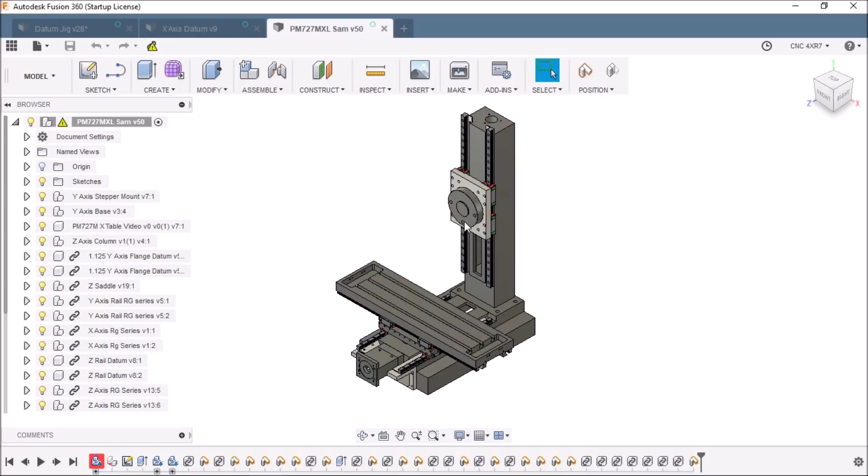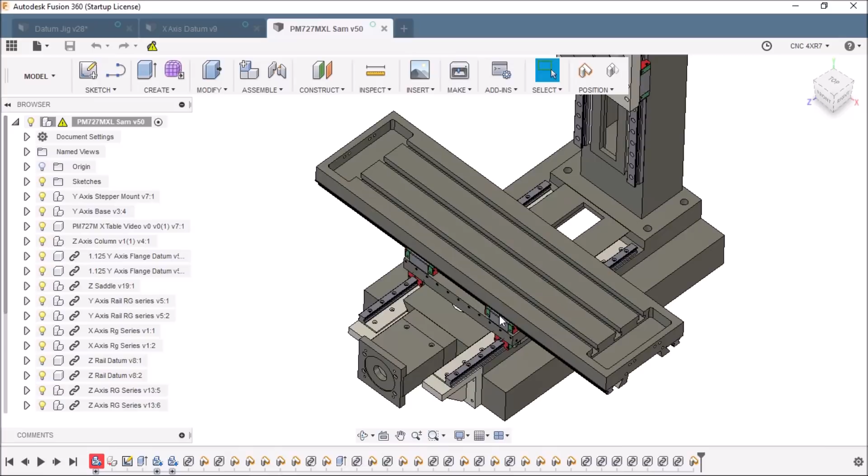Now in the previous video we discussed the model, and more specifically the way that we're going to mount the linear rails. We're going to be using these precision ground bars to use as our artificial datum here. That way we don't have to machine into our column and our base and destroy any of the castings. So let's take a look at how we're going to make a jig so that we can bore these holes.

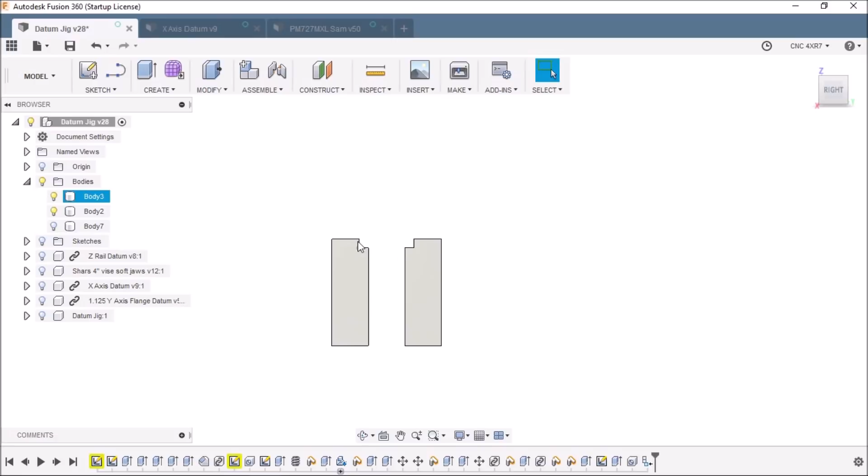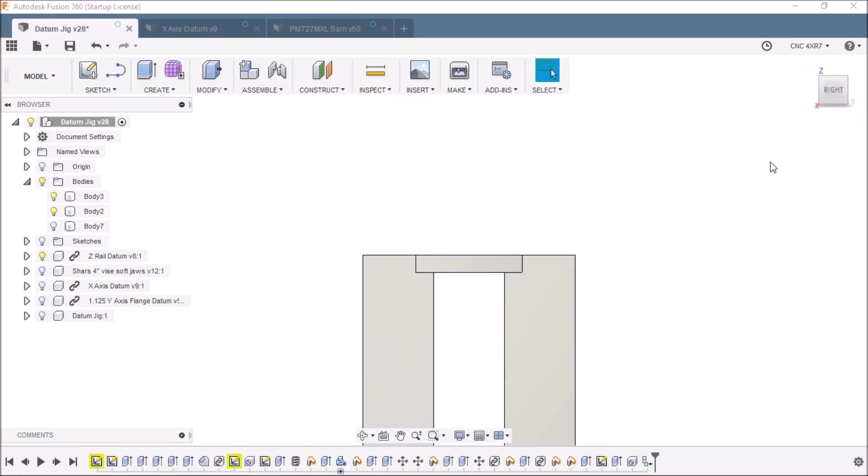Basically what I've just done is machined a couple of soft jaws. These are just aluminum soft jaws for my 4-inch vise. I have then put a rabbet or a shelf 1/8 of an inch by 1/8 of an inch, and this will allow the Z and the X datum to just kind of be able to be clamped together like so into the soft jaws.

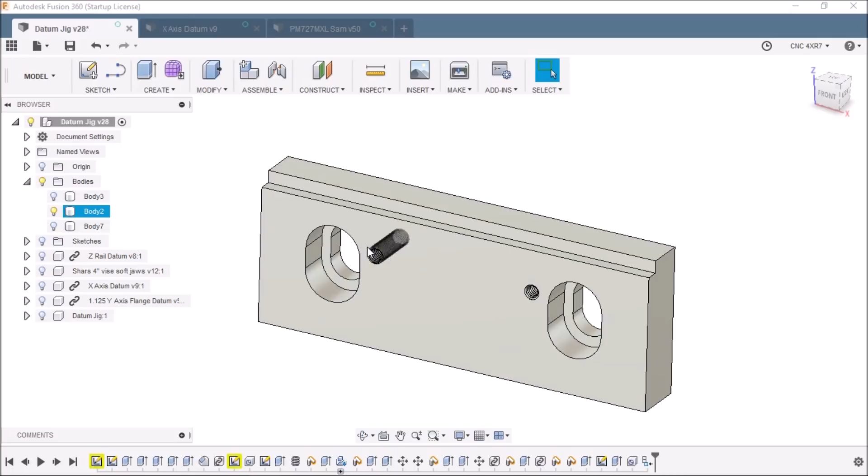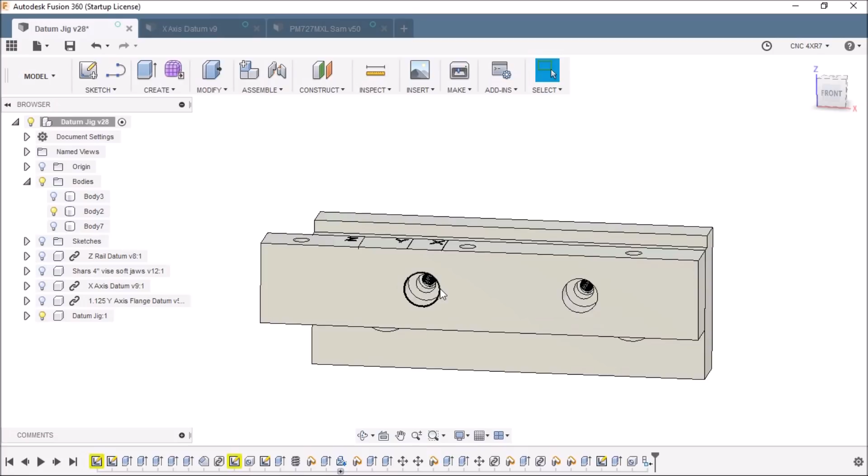Well, that's great, but we need to be able to index these holes because the datums are 27 inches long. So the way I decided to do that was to bore a couple of holes here in my back fixed soft jaw, and then I just made this aluminum jig here. So we've got a couple holes bored in here, and then we're going to use some M5 by 15 socket head cap screws to mount that.

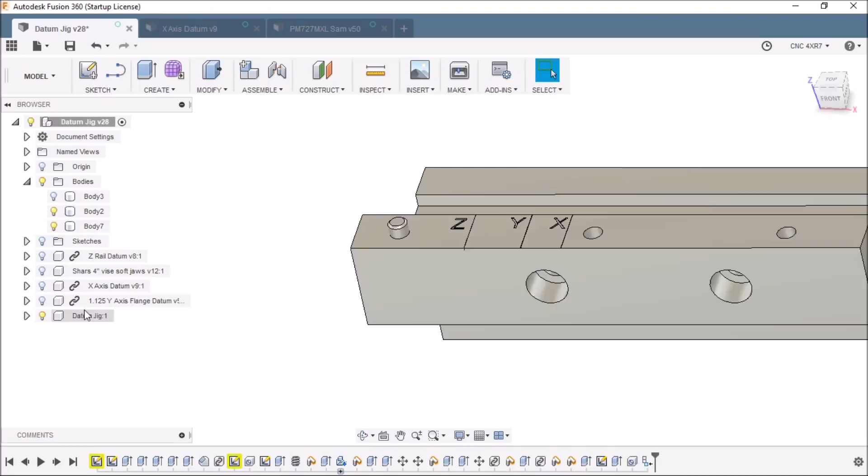And then we've just put a pin here. This is a 4.2 millimeter diameter pin, which is the diameter of the hole here that we're going to be machining into the datums. And so what happens is we'll index the edge of the datum on this line I've scribed here for the Z-axis. That is the distance between this edge and the first hole.

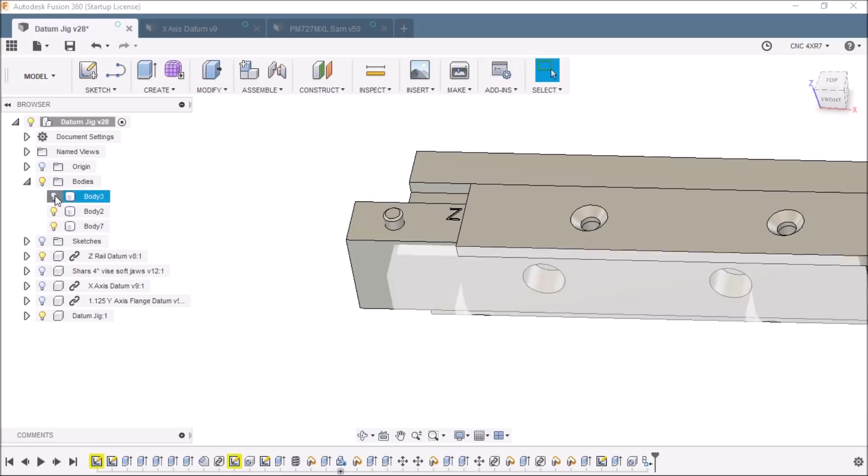They all vary between the different datums. We have our X and our Y datums. So the starting point's a little different, so I just scribed a line onto the jig. So what will happen is we'll bore our first two holes here. We'll clamp it up like so. We'll machine these two holes and countersinks.

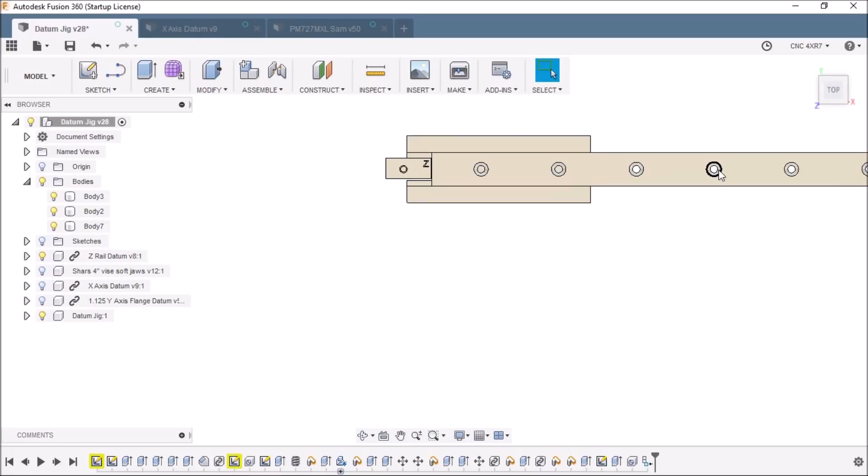We'll then unclamp it, pick it up, and we'll put this hole over our pin. Or actually this hole, I'm sorry, over our pin. And when we do that, then we'll just move down to the next two holes. Take this hole, put it on our pin, and we're going to do 2 holes per cycle. This was just the simplest way for me to do it.

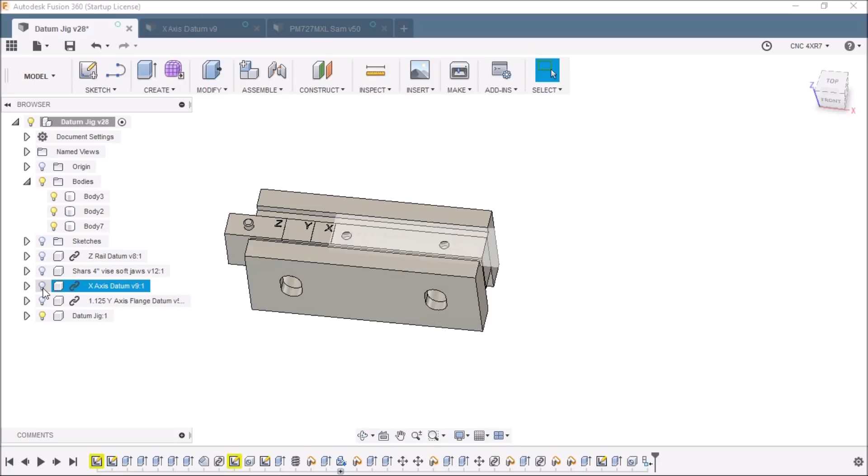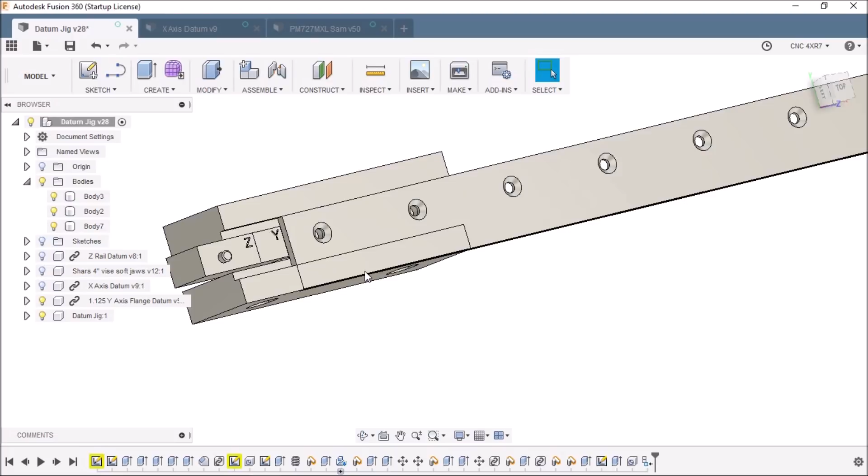That way I could use the same setup for the Z-axis, the X-axis, and the Y-axis. Now the Y-axis, of course, it works just fine. It's just the hole's going to be off-center, which is great. We'll put this edge towards the rail, and that'll help hold that down. And then that way I can get away with using the same jig for all 3 datums. Doesn't really matter if the hole's in the center or not. We're just trying to secure this to the base. So that's what I came up with for our datum jig.

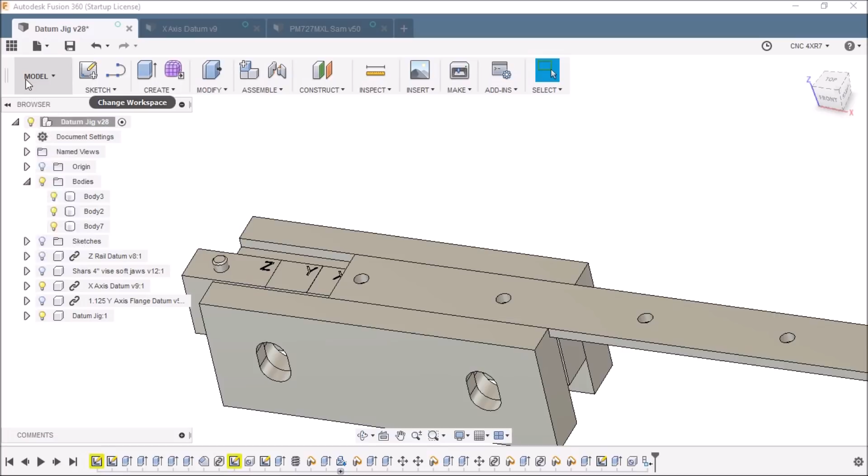Now one thing I ran into while trying to CAM out these holes and countersinks, Fusion 360 does not like to have the countersink already drawn when you're doing your CAM. And I'm not quite sure the best route to go about doing the countersink hole. This is what I came up with, which is about 10 different quick operations.

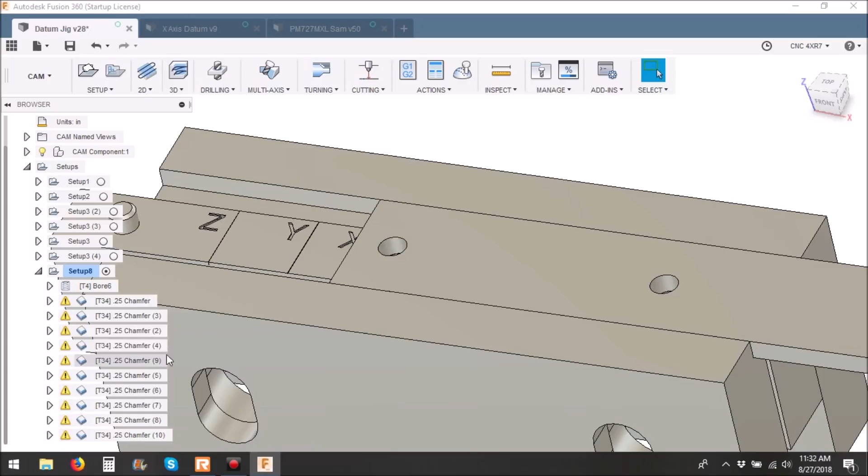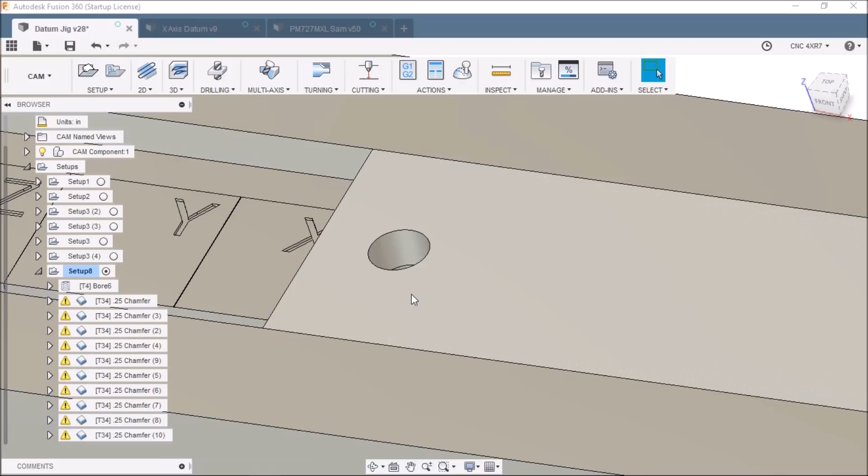And I know you think, man, you must be crazy. Why are you doing so many operations for just a little countersink? However, I didn't want to go down to the full depth and hog all this material out. This is steel, so I'm trying to just take a little bit with each operation. I don't understand why Fusion 360, and I couldn't figure out a way to do this, but with the boring operation, you can see we can just kind of spiral mill the hole.

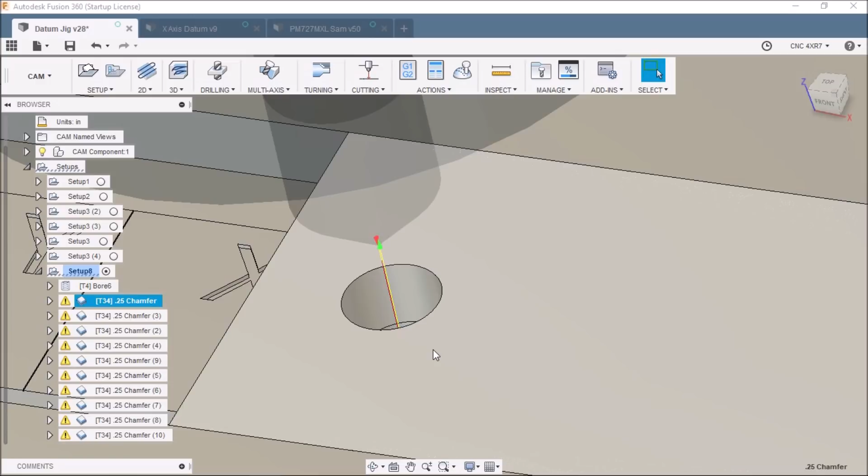Well, it would be great if we could just spiral mill the chamfer. Then I could just get away with doing it with one operation. We could sort of just spiral down to the correct depth, do one more circle just to clean the edge up, and be done with it. However, the CAM operation and parameters do not have, or at least I couldn't figure out a way to make it spiral mill. It does have a ramp speed here when you're selecting the tool.

On the geometry, that's another thing. If it's a countersink, then it has this big old diameter here, and this diameter is, you know, halfway down the thickness of the stock. So you have to not draw the countersink in order to get this diameter up top here. That was another thing that I kind of had to mess around with.

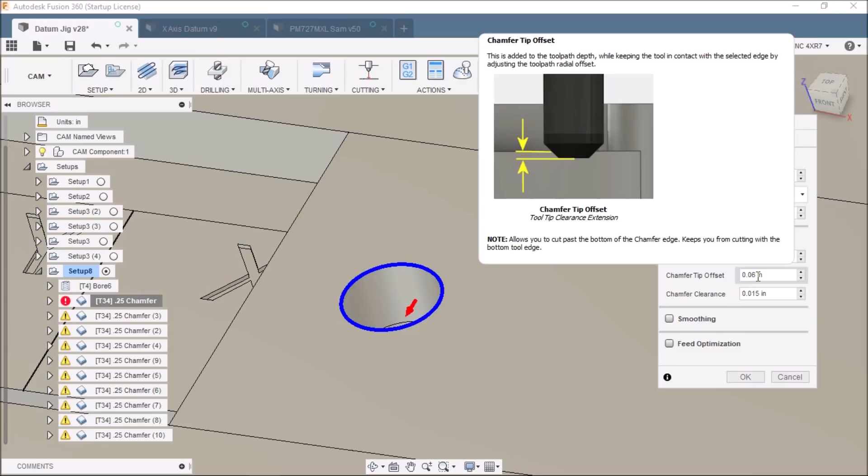On the passes, the only thing you can really mess with is the chamfer width, which is the amount of the tool that's going to be used, and then the offset here, which I'm using for the height. And you have to kind of play around with these numbers in order to get the correct chamfer that you need. But I couldn't see anything that would allow you to kind of ramp down in there. Maybe it's just my not understanding or something, but this is what I've got.

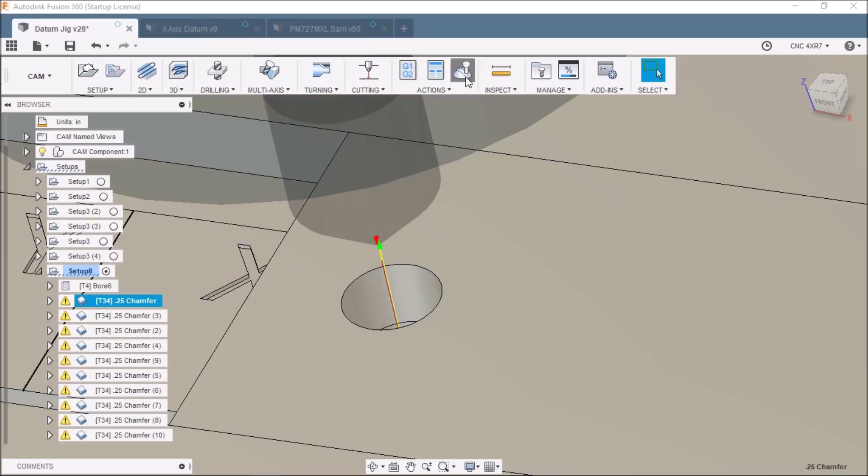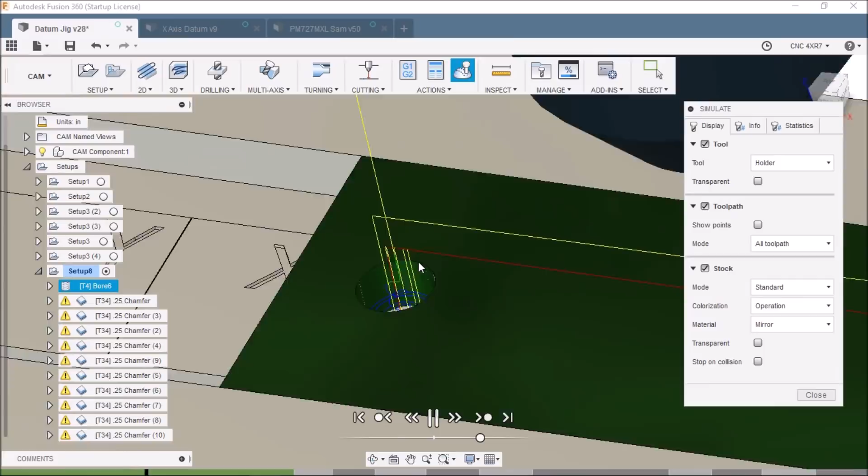I just go down. Well, let me show you the stock here. I just go down, and then I'm going to chamfer just a little bit with one pass, and then progressively we'll just do the whole thing here. I'm going to progressively go down. I'm going to bore the hole. Actually, we're boring two holes, both of them here with this operation. And then, well, I went too fast there, but with each operation,

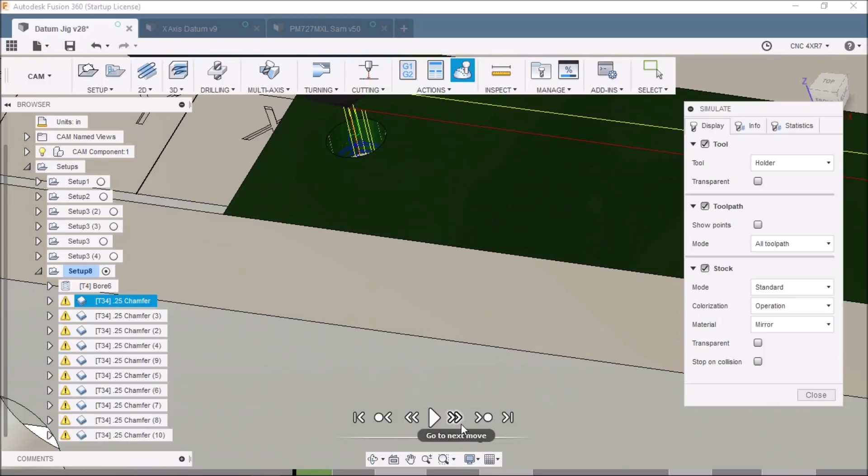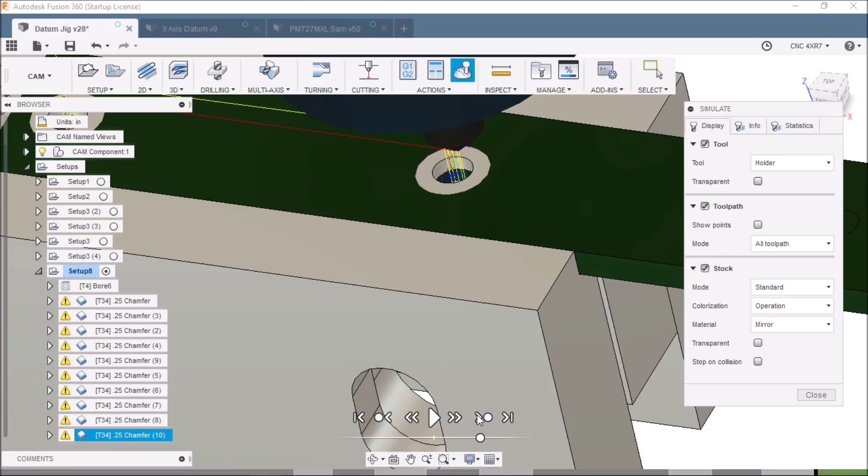you can see we will do a little bit more, a little bit more, a little bit more, and we'll do this final pass one additional time just to make sure it's clean, and then we'll move over to the next hole. We'll do it a little more, a little more, a little more, and one additional pass just to clean it up. That's how I plan to machine this out. It's really not ideal. However, I couldn't figure out a way to ramp this down.

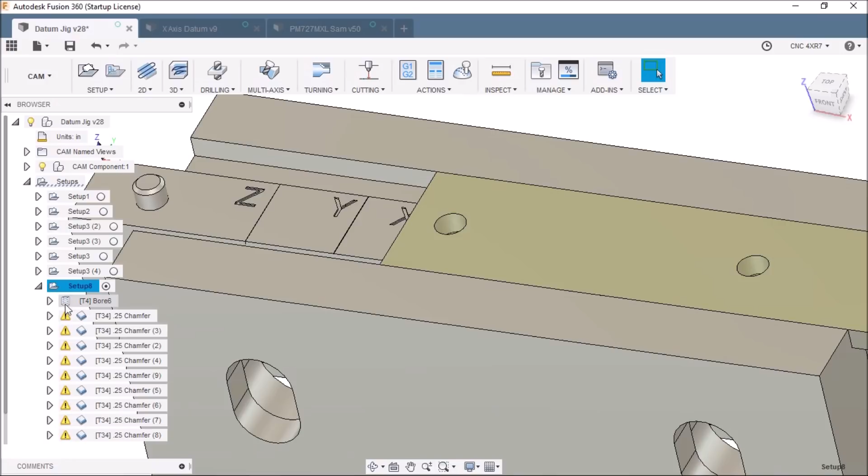I thought, well, maybe I could fool Fusion 360 into letting me just do another boring operation. However, if you do that, you can't select a chamfer mill. So you'd have to create a fake end mill and try to do it that way and figure that out. Maybe you could do it like that. So I'm going to just try this and see how it works out. But that is our datum jig, and hopefully it'll work out just fine. So let's go out to the mill and we'll machine out some of these datums.

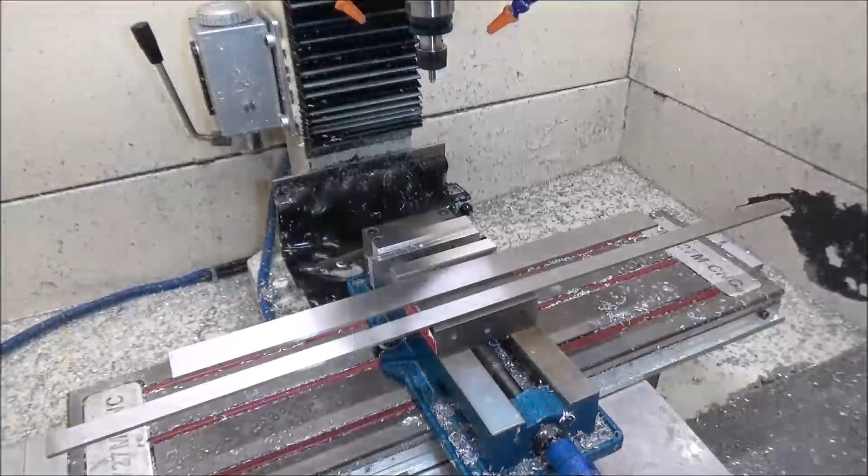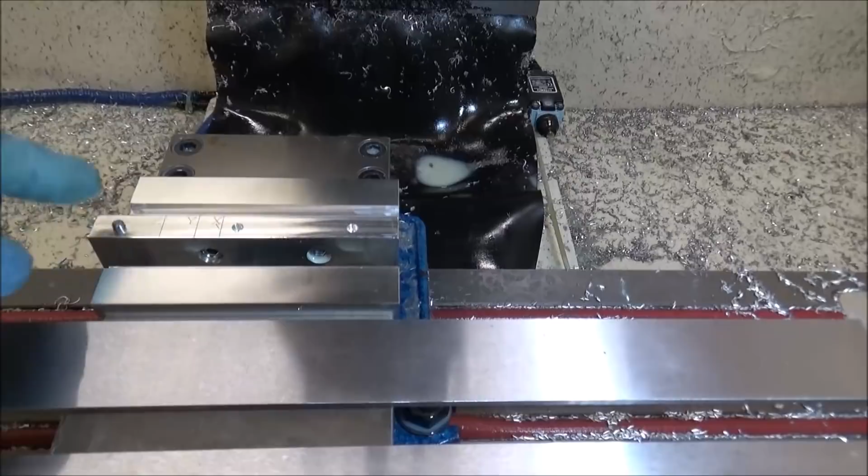Hey guys, well, here I'm at the mill, and you can see how the jig is created here. I've just got a couple of soft jaws, and then I've just mounted a jig with the pin here, and I've marked the starting location. I actually engraved that for the X, Y, and Z, and then all the subsequent ops will be here and here. And these are, I made them 43 millimeters apart.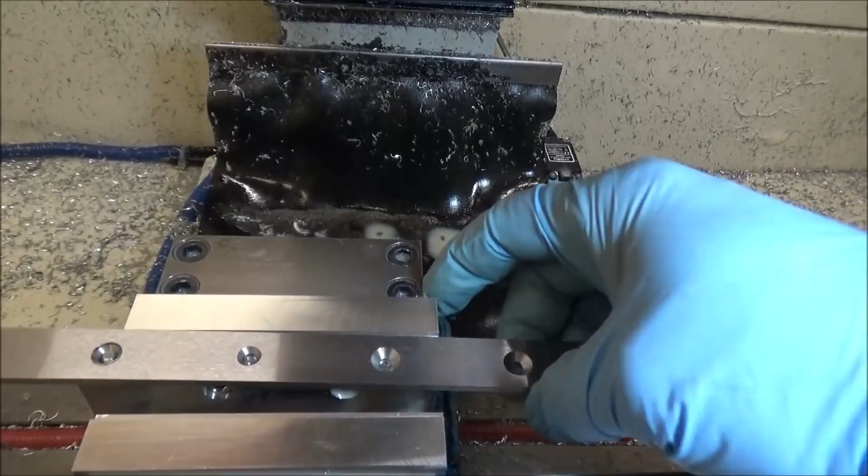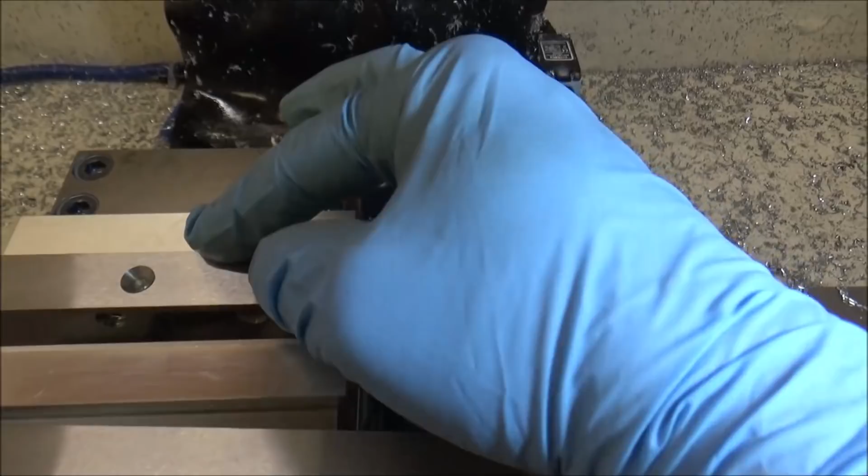So I took a scrap piece. This one's for my X. So I started off right here. Just lined that up, made the first operation. Then I take and put that second hole on my jig, clamp it up, and do the next two holes. Then just keep going down like so. Do the next two until I do the whole thing, which in this case the X is 27 inches long.

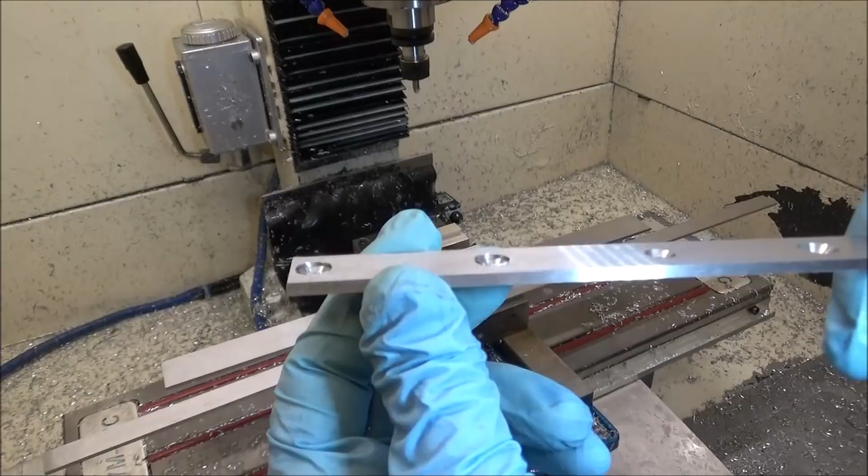I was having trouble with the countersink operation here. Let me put this back. I was having trouble with the chamfer operation. You can see I went too far there and there's like a burr. Then I tried it, made some adjustments, came back, and it was too shallow. This one, the depth was okay, but it was too deep and it kind of made that burr. Don't want that. This one was too shallow. The head of the screw is sticking up. It needs to be flush or below.

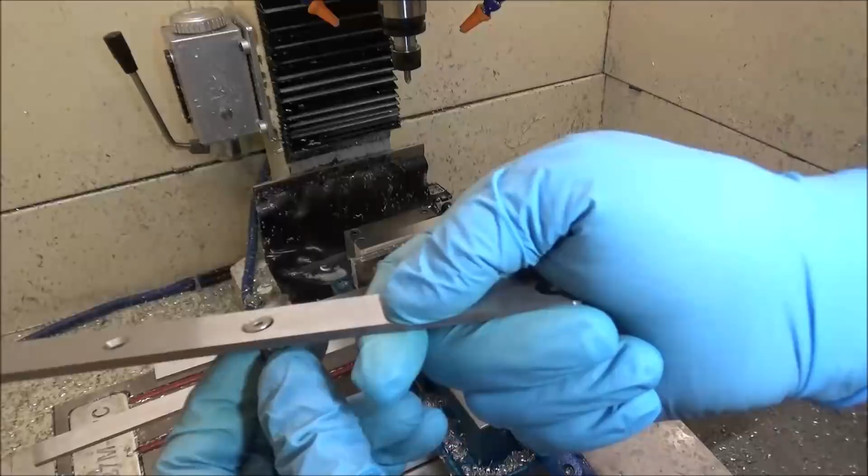Then I made some more adjustments and I got it below, but it's too far below. So I came back and finally I think I've got it just right, where it's just below the surface there. It's not sticking up and I'm not taking off more material than I need to.

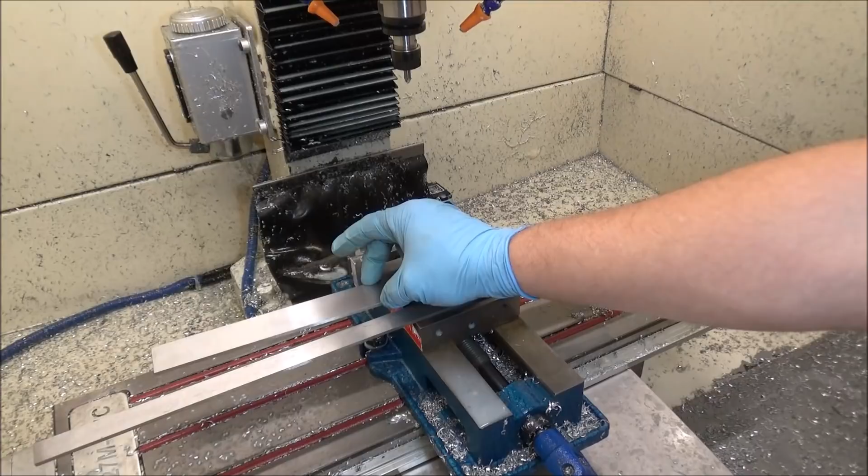So now that I have it done, it's just a matter of running this operation for all the different dados. We have our Y dado, which is going to end up being about 1.25 inches. It's 1.25 inches now. It's going to end up being about 1 1/8 inches or 1 1/16 inches, somewhere in there.

But I've made the jig so that I can clamp both sizes, and then the X and the Z are both 3/4 inch. So the hole will still be the same distance from this edge over, and it really doesn't matter for the X. It'll be in the center for the X and the Z, and it doesn't really matter for the Y. It'll just be about 3/8 over from the front edge.

So in order to get started, I'm just going to line the end. Now these are already 18 inches, which is the correct length for the Y rails. So I don't have to cut them to length or anything. So I'll just line that up on my line, which is my starting point for the Y.

Now bear in mind, these holes to mount these datums aren't critical, but I did want to get the spacing. I didn't want to just bore them by hand. So I made the jig and I can get them all spaced exactly the same, and it works out, makes it look nice. So alright, I've got the Y mounted in there. We'll go ahead and machine the first two holes.

Alright, take a look at that. Turned out pretty good, and our screw fits just nice. I'll get it in the camera, Sam. Alright, so now we just lift and repeat. Put it down in there, clamp it up.

Alright, now on to the next two. Eighth-inch end mill. Quarter-inch chamfer mill.

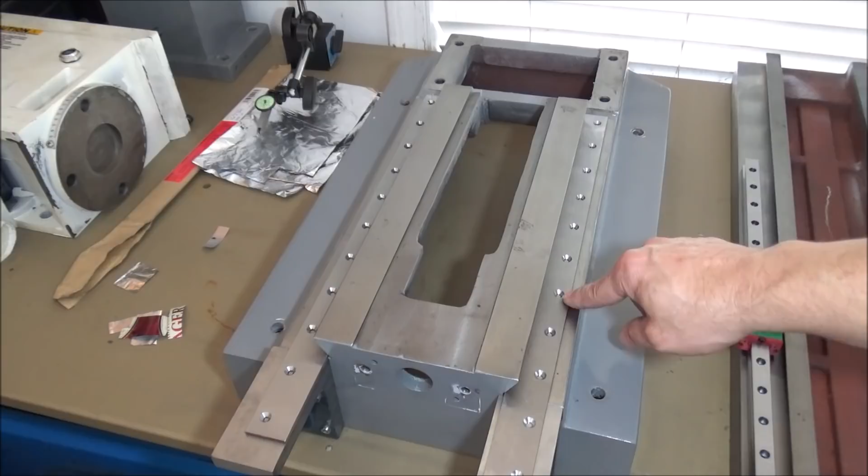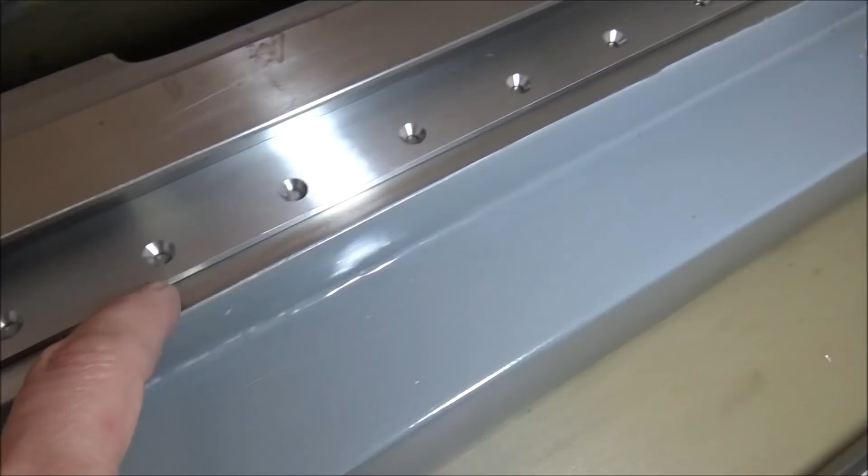And well, okay, I finished boring all the holes and countersinking to mount the Y-axis datums. I didn't want to bore you, so I went ahead and finished those up. And you can kind of see how they're going to mount on there now. Just screw down in there, and the mounting hole, since it's not in the center, it's going to be closer to the rail. It'll be more secure that way.

I still need to machine about 1/8 of an inch off of here to move this over so that the rail sits on there all the way. But that'll be in the next step. I'll do that after I remove the vise from the mill. I'm going to have to do that to machine those, so I want to go ahead and do the datums for the Z-axis as well as for the X-axis here.

So I'm going to do that, and in the next video we'll start concentrating on getting the rails mounted and machining the saddles.